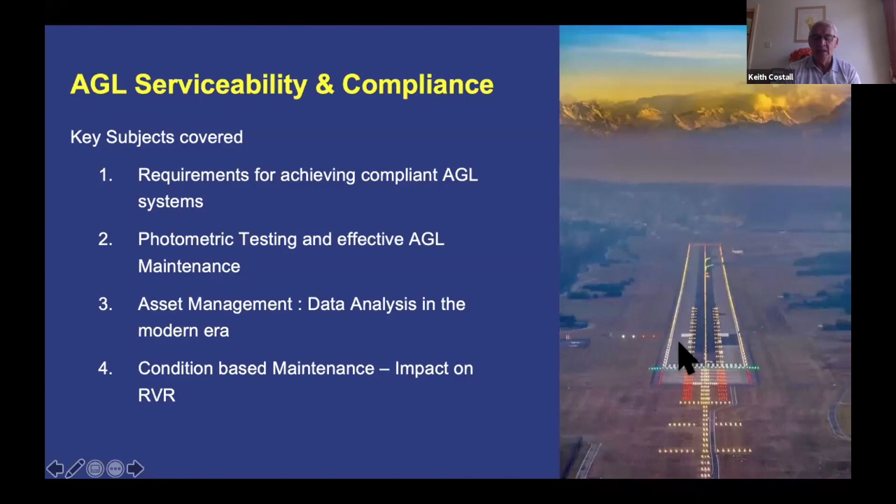So without further ado, let's move on quickly. Let's remember, every flight starts and ends at an aerodrome, hopefully. Right? That's what we want. And AGL is designed to support safe and regular aircraft operations by providing essential, clear and concise visual cues to the pilot, particularly important when visibility is reduced.

I'd just like to have a quick look at the dangers of underperforming AGL and look at the risk factor to the aviators. As the RVR, the runway visual range, comes down, the visibility comes down, the risk factor goes up, and you'll see this by this exponential curve.

But the issue is, what creates underperforming AGL? There are various factors. There's an electrical factor - why? Because it's a light unit, and a light unit needs electrical power. If we do not get the correct electrical power to the light unit, we've got a problem.

There's an optical issue, the photometric side, the output. For example, you'll look today at rubber being burnt off aircraft tires onto an inset light in a touchdown zone or a runway center line. It's an optical issue. There are issues like with tungsten halogen lamps and things like that.

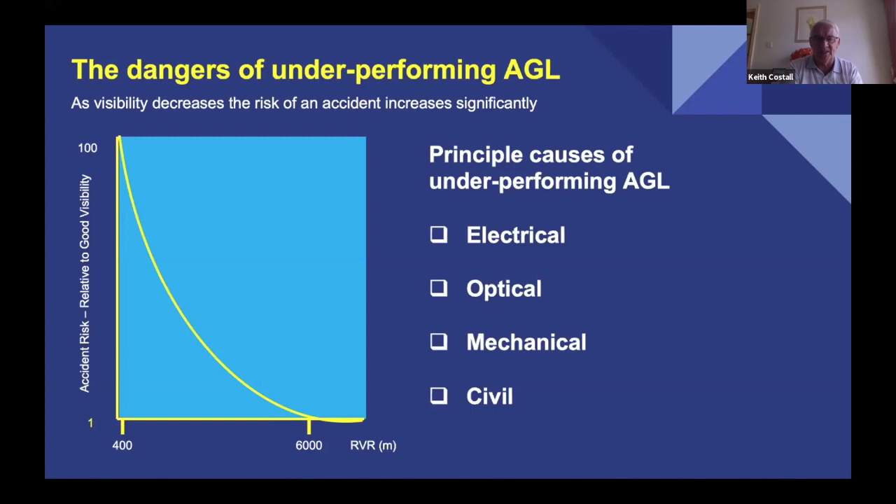So let's have a look at what happens in low visibility. I've got a few slides here. When you're coming into land in lower visibility, you're approaching, and eventually, in low visibility, you'll see the approach lights. Then progressively you'll see more lights. You'll see the lights before you see anything else as a pilot.

But as the visibility decreases, let's start with this one, around 600 meters visibility approximately. If we see a center line and some runway edge lights, that's probably what a pilot will see in lowish visibility. That is category 1, very close to moving into category 2, below 550 meters.

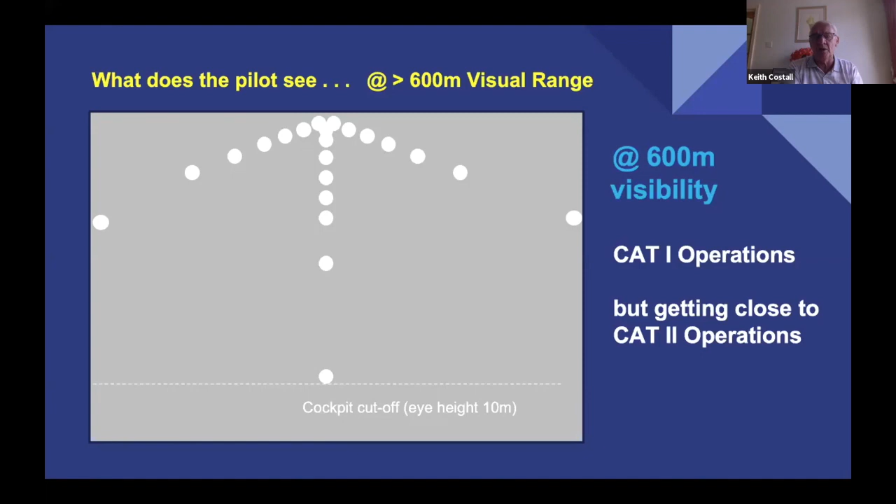As the visibility drops further, we lose the lights in the distance. So the pilot will only see something like that, around 200 meters. This is now Cat 3. If you're traveling at 200 kilometers an hour, that's around 55 meters a second, and you can only see this amount of light - it's difficult.

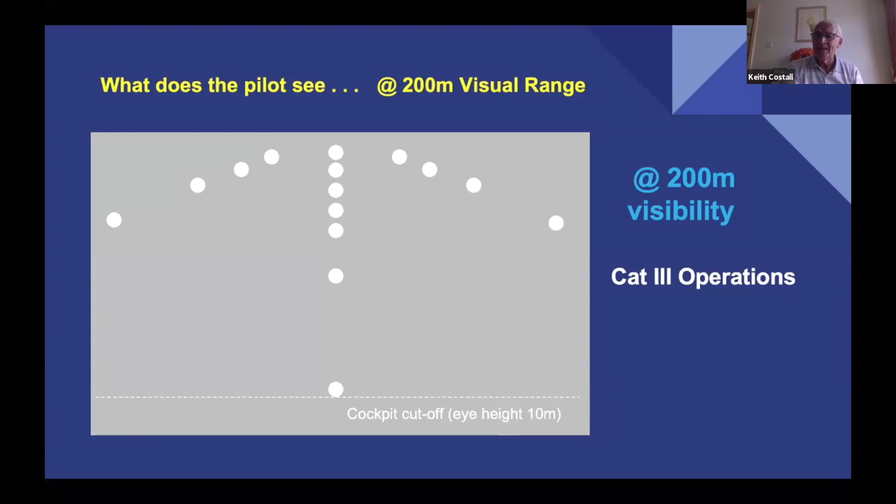Hence why category 3 approaches are principally instrument landings, getting worse as we go down to the lower end of category 3. Remember, we have category 3A, 3B, and 3C. At the lower end of visibility, about all the pilot will see at 55 meters a second, 200 kilometers an hour, is the blink of an eye.

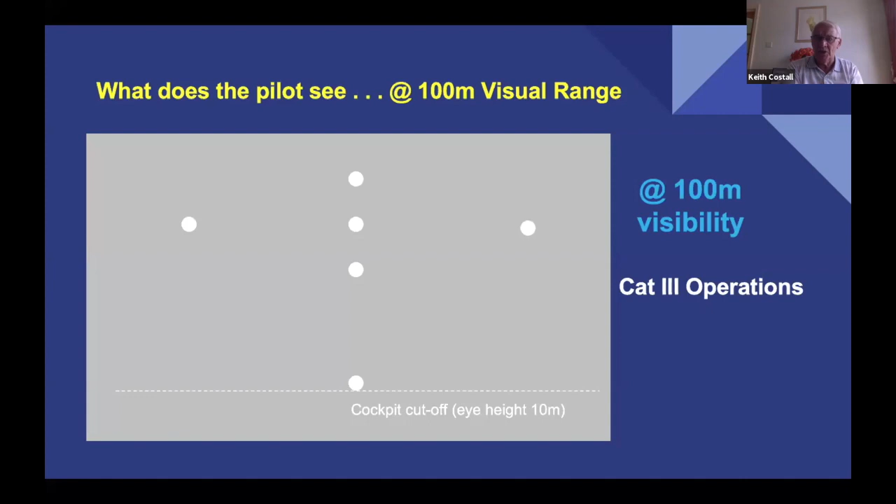And that's why it's really important that we've got visual aids to supplement the approach and landing, to supplement the electronic aids which enable a pilot to land under instrument flight rules.

So the main issues associated with light output - let's put them into 5 bullet points. The beam intensity, the average beam intensity - we look at Annex 14, Volume 1 for that, and there are Iso-candela diagrams in there which help us understand it. But also the shape and size of the beam - every single light unit in a system has its own Iso-candela diagram, and we have to point them in the correct direction. So beam alignment is very important.

We also have to have some kind of uniformity. It's no point having a hot spot down in the left-hand corner of a beam - we have to have some uniformity.

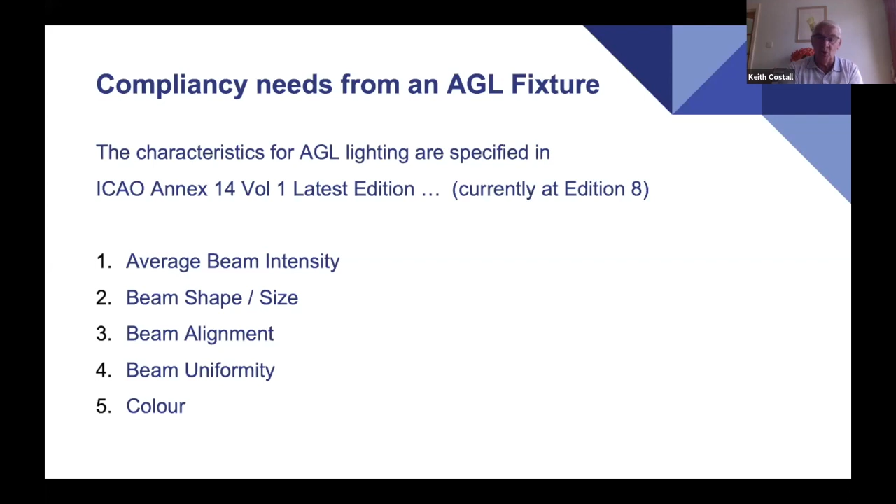And of course in AGL we use color. We need to define - the lights need to show the correct color. One of the issues in our industry over time, if there's poor maintenance or a deterioration of the optics, white starts to look yellow. So color is an important factor.

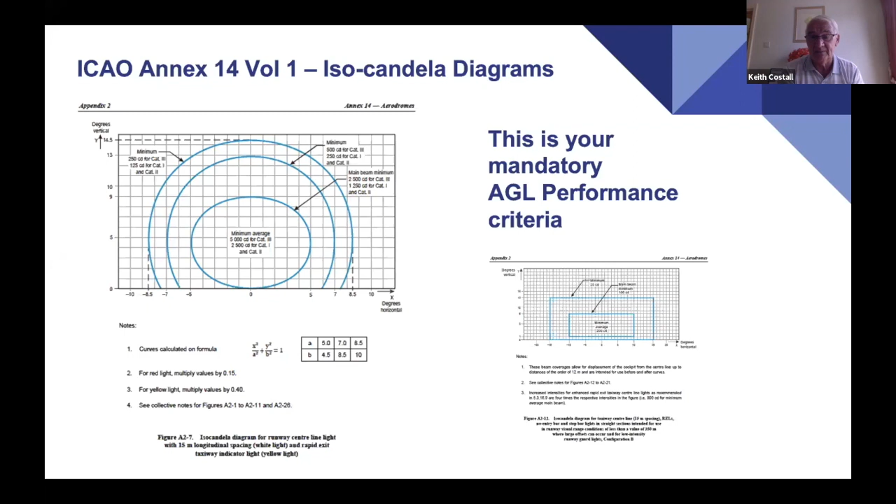Okay, so moving on, let's have a look at that inner ellipse. This is really, really important because on the inner ellipse, when we measure and want to get the average beam intensity, there is a set of grids in the Iso-candela diagram, one degree grids. The guys are going to look at this a little bit later. But when we look at this grid, and this is a runway center line, the inner ellipse of a runway center line, on this 1 degree grid there's 52 measurement positions at the crossover points, 52.

And therefore, what we do to get the average, we take the photometric calculation of every single point, add them all together and divide by the number of points. So we divide by the number 52 in this case.

Now the issue is, and what I want you to bring to your attention, if you've got rubber filled up at the bottom of the light fixture and you take away that bottom row, that is 1, 2, 3, 4, 5, 6, 7, 8 photometric points. 8 out of 52 as a percentage is around 15%.

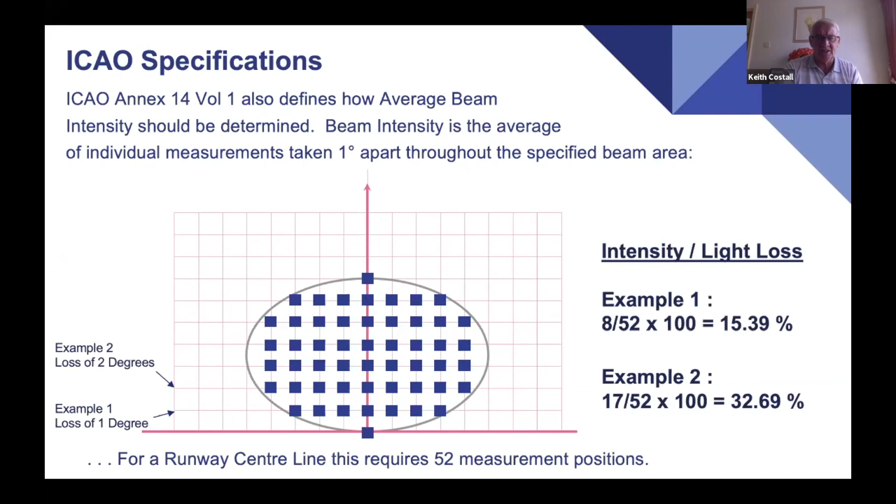And if we took out the second row, that would be 17 points, 17 out of 52ths worth. As a percentage that's nearly 33% of your light you have lost. And 33% light loss is already needing maintenance. So I just want to bring that into your thinking at this time. But the guys will look at that a little bit clearer and with more explanation a little later.

So when we're looking at light output, we're talking candela, or candela as some people call it. And the measurement of candela, we have different levels depending on the system. We have an approach system, and then we have the runway related system, and I've just shown 3 here. Generally speaking, they're all white light.

We know there are, in an edge light, they are yellow towards the end. We know that on a center line, they go red, white, and then red towards the end. But the approach lights, with the normal approach lights, with the exception of the supplementary or the side row barrettes, are all white.

So this is white light. And when we're looking at white light, an approach system is 20,000 candela. An edge system is 10,000 candela. And a center line is 5,000.

Well, that also means that as a pilot is approaching the runway, he's looking directly at those approach lights, he's got 20,000 candela. But as he approaches the threshold and gets onto the runway, then the lights are more in his peripheral vision, there's a lot of other things going on. So the ratios are important between those, and that's why we've got those different levels of light output.

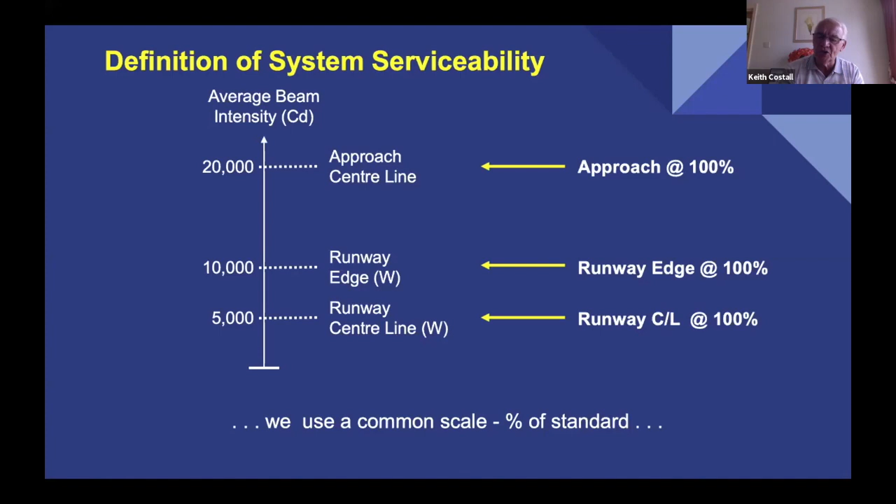But each one, if I say what light output at 6.6 amps is for an approach light, I say 20,000 candela at 6.6 amps, that's 100%. If it's a runway edge light, I say okay, at 6.6 amps that's 10,000 candela, that's 100%. And likewise for a center line, a center line at 6.6 amps, maximum candela is 5,000, 100%. So we use that percentage as a reference point.

So looking at that percentage of 100%, there's a little diagram here where I show 2 parts. There's the serviceable side, that is above 50%, because ICAO defines a light to be unserviceable when it falls to 50% or below its design. And the design we base it on 100%. So below 50% is unserviceable, above 50% is serviceable.

But we do not in maintenance wait until it becomes unserviceable before we do maintenance. So we've also brought in another percentage, which is the recommended percentage, where we start to do maintenance, servicing those lights before they become unserviceable. And that's the criteria that we adopt in photometric testing generally.

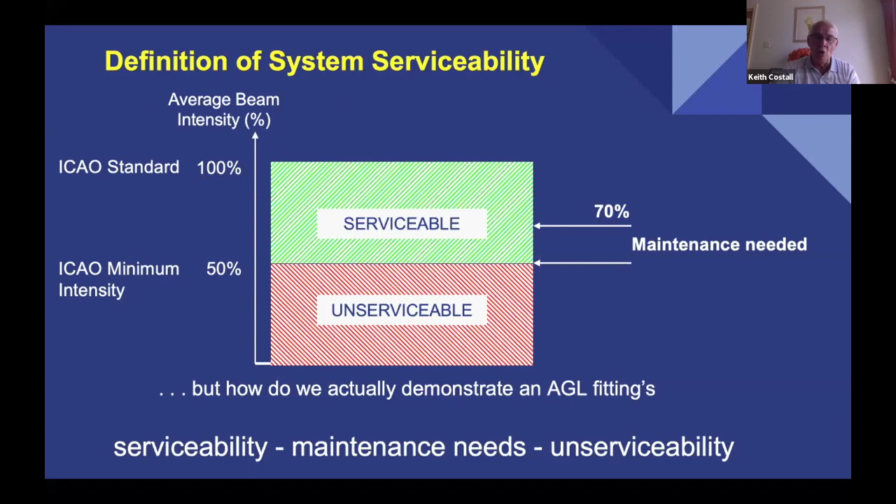And if you look at, as I said earlier, the Aerodrome Design Manual, Part 4, Chapter 17, there's a whole section on this. So how do we actually show it? Well, I've mentioned the 50%, I've mentioned the 70%, and I've mentioned the 100%. So one of the best ways and the simplest ways to show it is in a bar chart. The other guys are going to show you more in-depth ways of looking at it, but as a bar chart.

And here, look, I'm showing an absolute wonderful system really. They're all greens, so green is above 70%. But there's a couple of blues and a red. Blue is between 50 and 70% output, and red is 50% or below. So there's a pretty capture snapshot view of a typical example, and this, I'm just using the center line once again as an example.

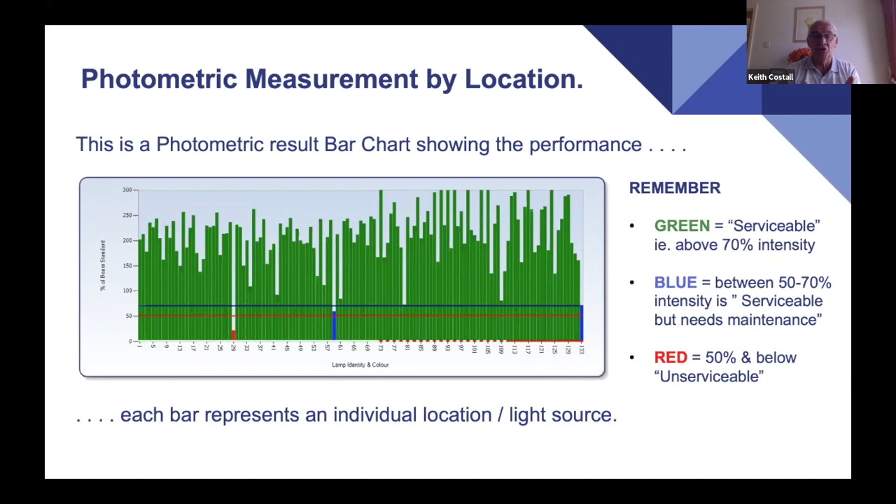Moving on, we also talk about a system. So I've spoken about an individual light up to now. An individual light at 100% is 6.6 amps, falls to 70% needs maintenance, and at 50% is unserviceable.

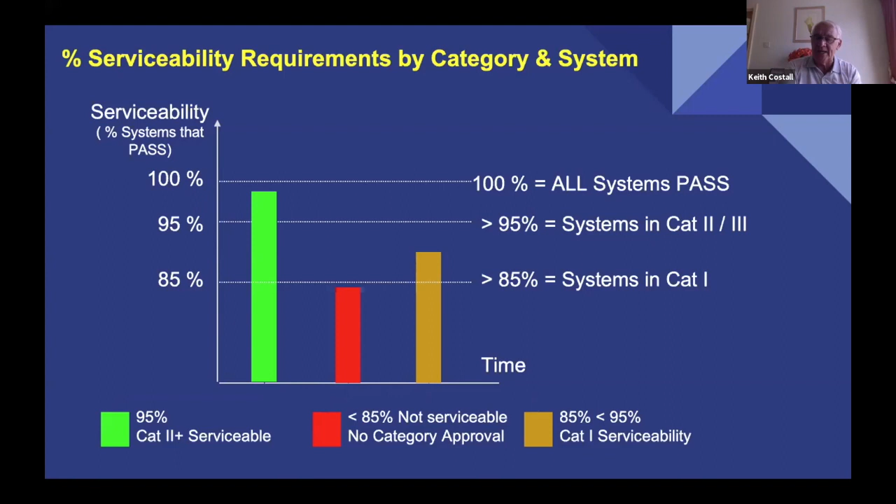But when I put those lights into a system, there's some generic ways of looking at it. If I took a runway edge lighting system in Category 1 operations, 85% of those lights need to be serviceable, with no 2 adjacent lights out. If I took that same system in a Category 2 and Category 3 operational scenario, 95% of those lights must be serviceable. So we've got a different way of looking at an individual light versus a system, and we can demonstrate that through photometric testing.

So how do we look at a light? If you're a human being, we know we've got light intensities. We normally have 5 steps of light intensity for a runway-related lighting system and 3 steps generically for a taxiway lighting system. But step 5, in the international theatre, is 100%, and step 4 is 30%. A human being can pretty much not see the difference, especially under lower visibility conditions.

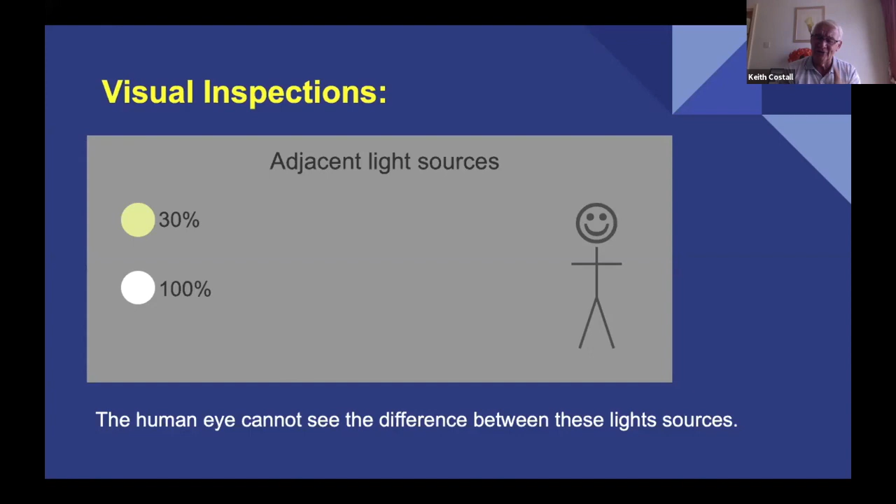This is a typical example, because the light diffracts. You know when you're driving through mist and fog and your headlights reflect back at you - same scenario, it diffracts out. So a visual inspection might be good to say, oh, that light's out, or that one looks dimmer than that one, because we're reasonably good at comparing one to another, but we can't actually measure light output as a human being. That's why we do photometric testing.

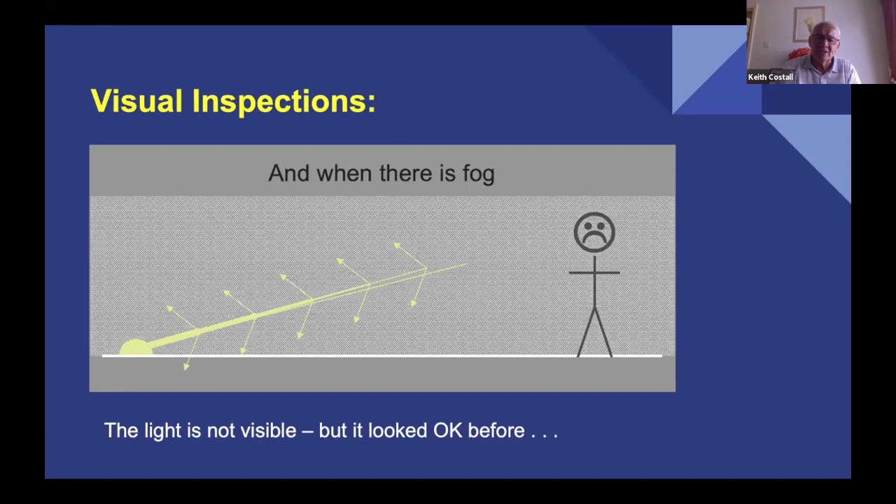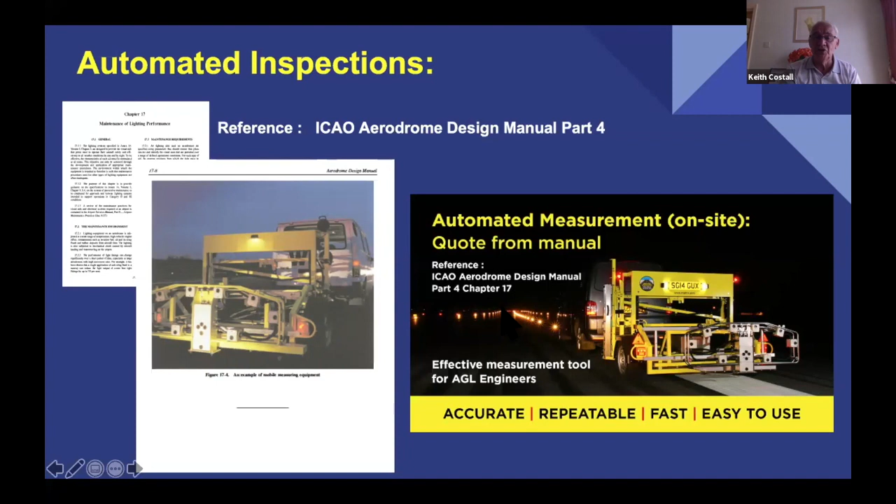Now that was taken quite a few years ago. The modern one looks very similar, but of course there's been a lot of technology advances since the early days.

So when we're looking at using photometric testing and other elements for maintenance and the effectiveness of AGL, we've got a bit of a cycle here, because the reality is you cannot manage what you do not measure. It's as simple as that. So we do have a cycle: we measure it, we maintain from the results we found, we continually monitor, which enables us to manage, and that cycle continues. And that's what we're going to look at today.

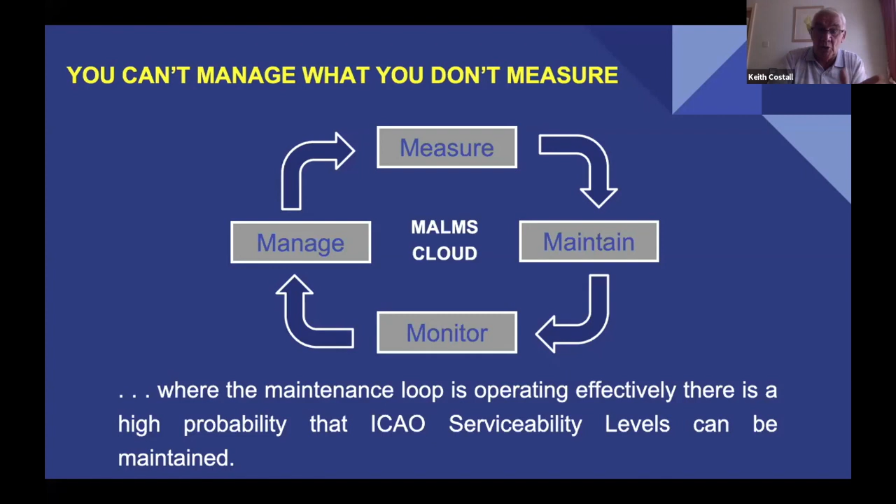So what kind of cycle of inspections and maintenance do we do? Now I'm not going to go through too much of this here, because you'll be able to get this presentation to download. But I've split it into Cat 1 and Cat 2,3, and I've just chosen 3 runway lights.

Very generically, in Cat 1 we need to achieve 85%. So if you've got, say, an edge lighting system for Category 1, you need to be doing maintenance on it probably every 3 months, 12 weeks. But if there's high traffic density, you may have to do it every 6 weeks. And if it's low traffic density, you may be able to do it every 24 weeks.

Only if you are managing - so you're measuring, monitoring - can you make this decision. So these are just an example, not fixed in stone. Don't believe, 'oh, Keith said this.' It's about measuring, monitoring, maintaining, monitoring, assessing and making these decisions.

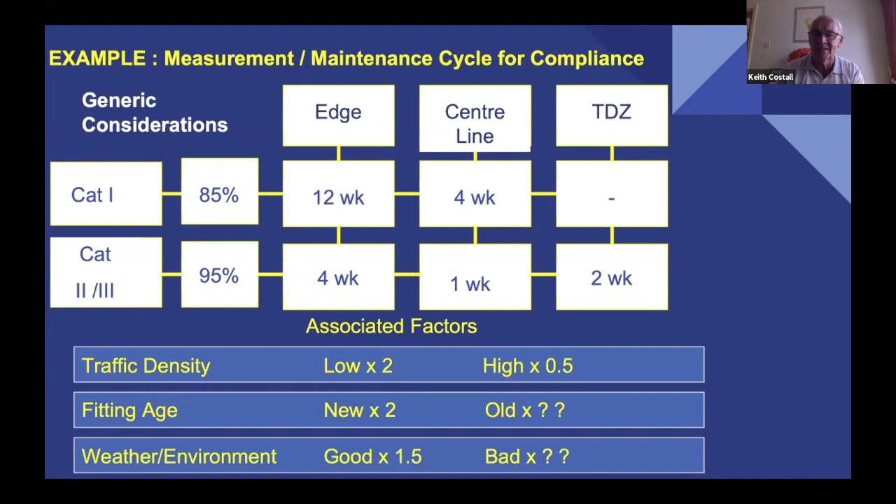So I'm moving on from there. I mentioned earlier, but I'll mention it again, some criteria associated - why do we get such a variation in performance? Electrical, optical, or civil and mechanical, and of course the light fixture. Out there, a lot of you have tungsten halogen, and a lot of you have LEDs. Different criteria is involved now between the 2 technologies, but the concept is still the same.

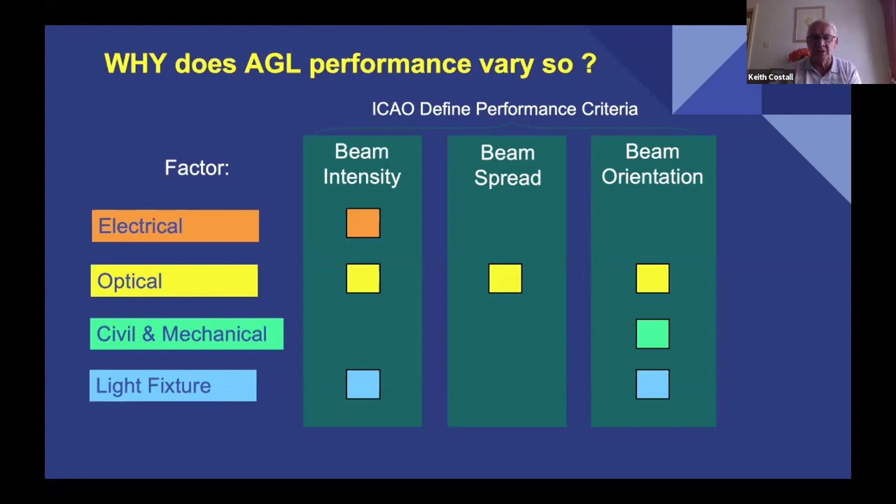So, summarizing, when I look at the life cycle of AGL - right from conceptual design, detail design, manufacture, delivery, installation, and then into commissioning - is it fit for purpose? We need to be looking at the tools to demonstrate that, and onwards through maintenance.

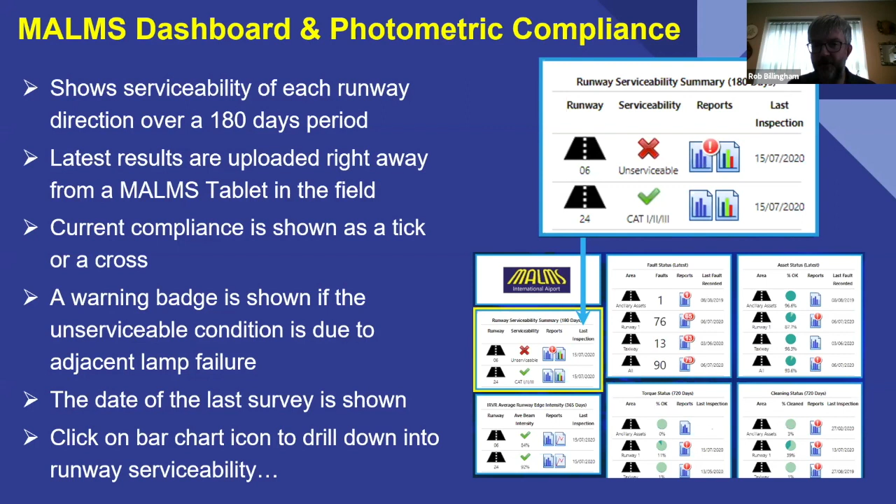We've got two icons to drill down into runway serviceability and straight into the course bar chart. Starting off, we'll click on runway serviceability, which brings up a bar chart - a single page for each runway direction in the report. Each bar represents a service: centerline, edges, TDZ, threshold, and runway end. Each service could be more than one course within the MALMS system - centerline is just one course, edges is two, TDZ is multiple courses.

The percentage shown is the percentage of lights which are above 50% of standard. To get a green bar for centerline, we need to be over 95% to be serviceable. Between 85 and 95 we'd have an olive bar, not shown here, which would leave the runway Cat 1 compliant only. Below 85% we'd have a red bar. Here on the edge we can see we're at 86%, so by rights this should be olive, but we can see adjacent lamp failure - somewhere on this edge there are two lights out together, which gives us a failure condition.

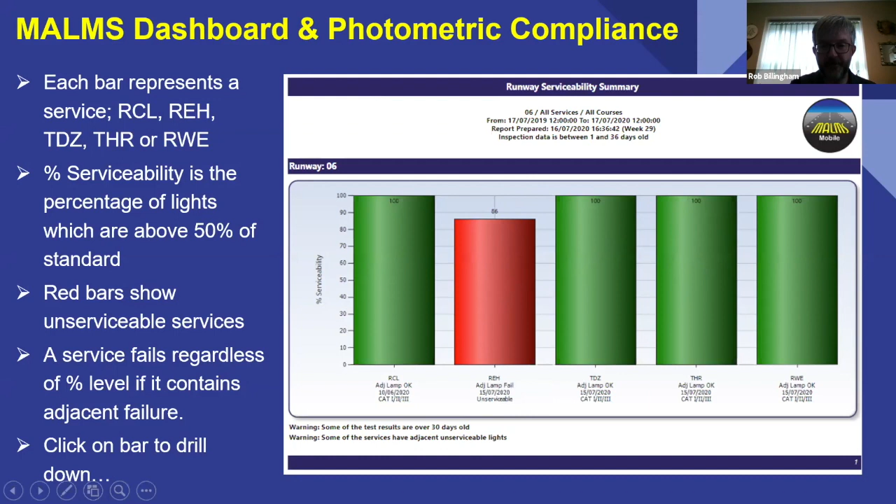So we'd need to investigate that - we'd click on this red bar and drill down now into course bar charts. This is a staple report used by moderators and engineers alike. Each bar represents a single lamp within the course on the runway - here we're looking at the edge port course.

A green bar represents a lamp over 70%. Between 50 and 70 we have a blue bar, meaning the lamp may need some maintenance. Below 50%, red bars mean lamps definitely need maintenance. We can see here our adjacent failure condition - two lamps out together, and a bit further down the runway, the pass-fail levels of 50 and 70% are shown.

We'll discuss this a bit more later. The 50% is defined by ICAO. The 70% is user configurable, and you could even raise the bar - lots of airports do, we might up this to 80%. You'd have more blue bars, but that would help you achieve even better compliance. Along the bottom you can see the lamp colours shown along the x-axis - we've got reds, whites, and yellows.

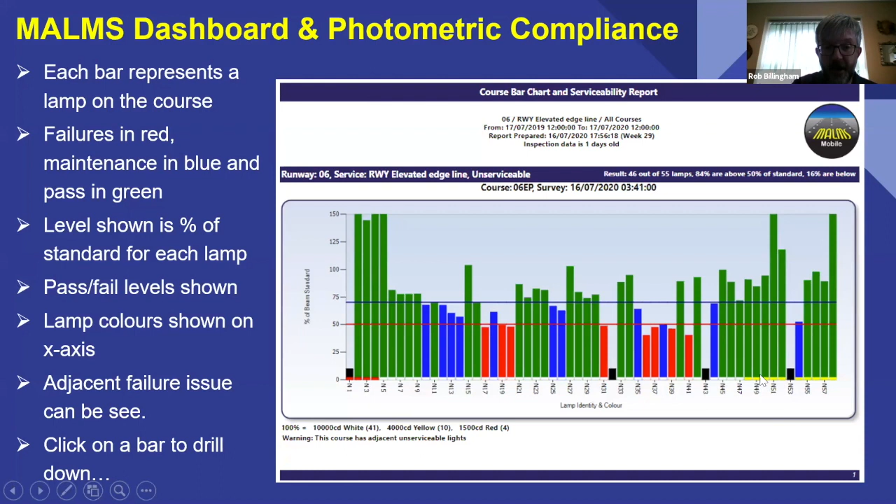So now, if we wanted to look at this adjacent failure area here, we click again and drill down into Iso-candela diagrams.

So I'm going to hand over to Paul shortly, and he's going to talk some more about iso-candelas and what they mean.

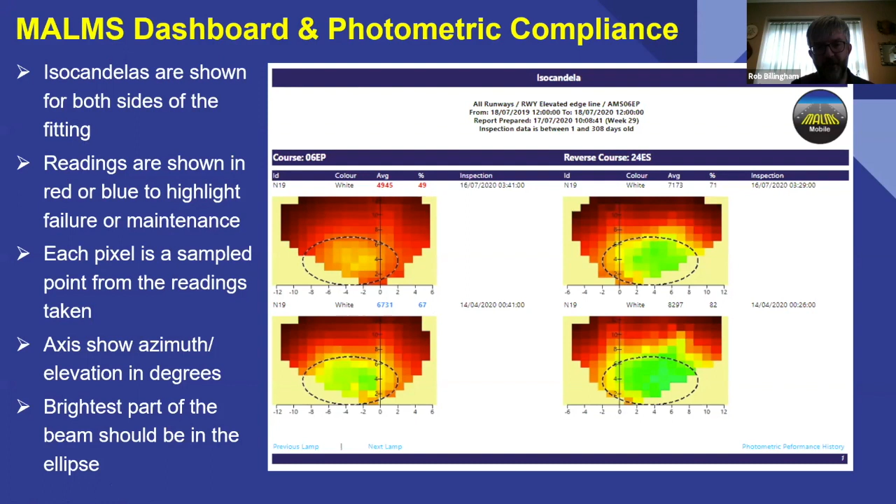Hey, thank you, Rob. Thank you, Keith, for the excellent introduction as well. So I think what we'll do now is talk about our version of an Iso-candela picture and how that is interpreted so that you can see what's going on.

The elliptical regions that you see here are the inner ellipse, as Keith explained from the ICAO Annex 14 manual. We just draw those on the screen for reference. That's where ideally we want our main part of the beam to be pointing. Our Iso-candela pictures also have square blocks. Each one of these square blocks happens to be on the 1 degree grid point that Keith was talking about earlier on, so you can see where each measurement point is.

We use our standard color method, a false color scheme where we show some strange looking colors, but it helps you to distinguish the beam pattern more clearly than if we just showed it as a grayscale image. There are options on the website to change the color scheme, but this is the default color scheme that a lot of you will already be familiar with.

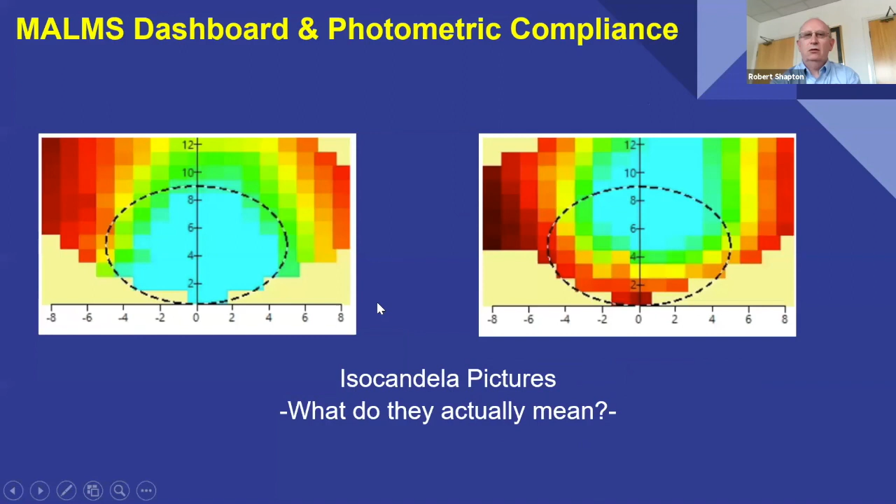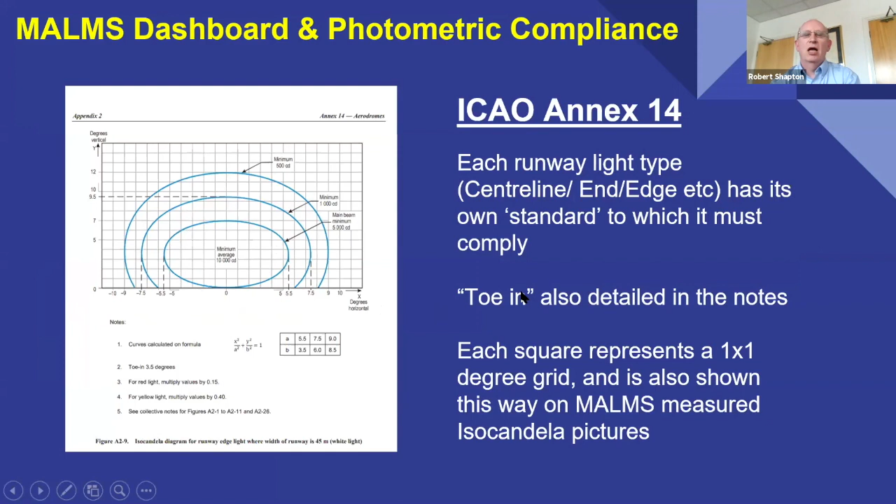So I shall move on. Here we go again - here's the inner ellipse we're talking about, and here is the 1 degree grid we're looking for. And again, as Keith was pointing out previously, there is a toe-in angle specified for some fittings like edge lights and/or touchdown zone lights.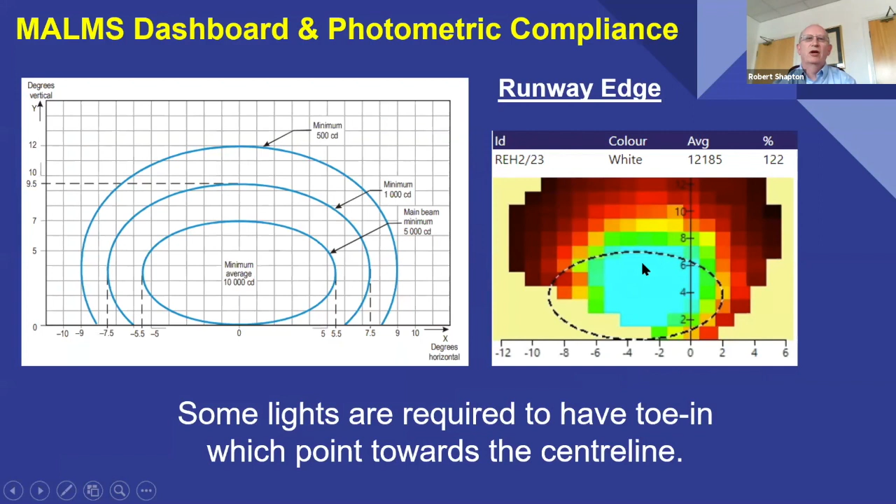So this particular example here - then we have the ellipse there, matching this ellipse here. In this particular instance, there is a toe to one side, which we've moved the ellipse across to match, the relevant toe angle being 3.5 degrees. This is where we expect the light to be pointing, and in this instance, that does appear to be quite correct.

With a lot of elevated fittings, what you will find on the top is there is an arrow or some other kind of marking which should be pointing towards the runway center line. When that is the case, your fitting has the toe left and toe right pointing so that the beams are shining inwards towards where we expect the pilot to be. If you put it the wrong way round, these light beams will be focused out into the grass, which is not where we expect the pilot to be, hopefully.

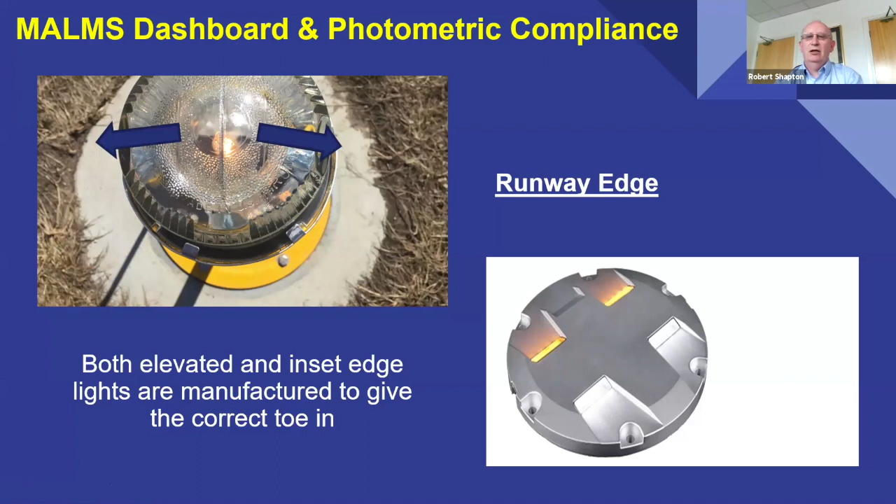Now, with the inset fittings, they still have this toe-in, but sometimes you can't see that by looking at the fitting. Specifically with the LED ones, they tend to be a little more difficult to discover which way they're actually pointing. But usually you will find a little triangular mark, an indentation, or maybe even an arrow sticker somewhere on the fitting to help you make sure you install it in the runway in the correct direction, the correct orientation.

For that elevated runway edge light, we have one side toe to the right and the other side toe to the left. As Rob has already pointed out, our reports will show you both sides of the lamp so we can look at what that light fitting as a whole is doing, or we can look individually at each side. That gives you a clue, by looking at both sides, what to expect when you actually go to physically see that fitting out on the runway.

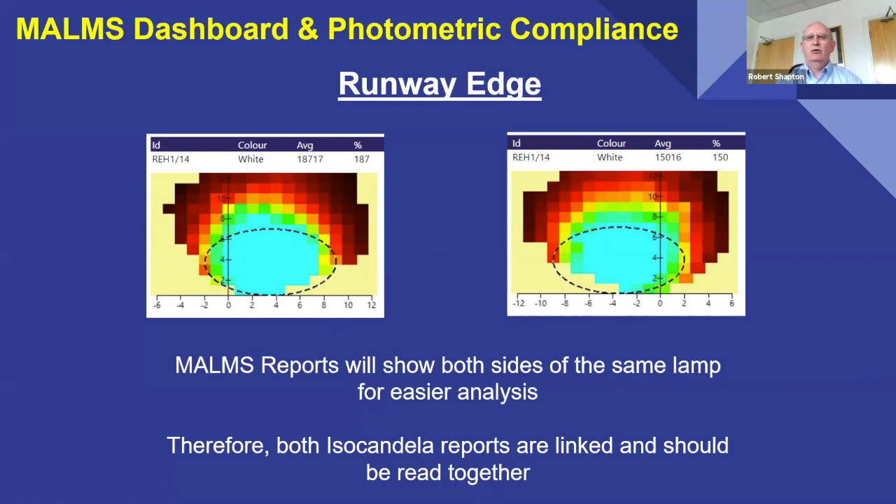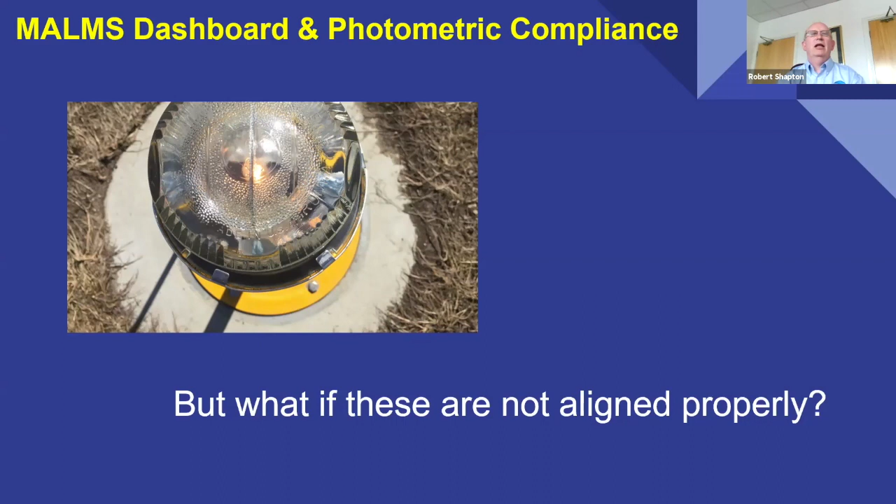For a typical elevated fitting, it's usually on some kind of frangible fitting, and people come along and cut the grass and knock these things, or jet blast comes along, or an owl decides it wants to sit on it. So they never normally stay perfectly aligned throughout their entire serviceable life. You have to keep coming along to them and adjusting their orientation and angles.

I have my glamorous assistant, Lucy, the lighting lady, who's going to help me here. She's going to do an impression of an elevated light fixture with her arms outstretched to indicate where those beams of light are pointing. She's got her arms outstretched but also pointing slightly forwards, so she's pretending to be an inset or elevated edge light, one side toe to the left and one side toe to the right. She's perfectly vertical, perfectly aligned, and the beams are pointing exactly where we would like them to be. Now there are only a few different scenarios for an elevated light fixture that can happen.

So if we push Lucy over, so she's leaning backwards, what tends to happen is that makes her arms point further up into the air. You can see here examples of what happens when you look at the two sides of the same fitting. The brighter part of that beam is now moving up out of the line of the ICAO ellipse. Just by looking at these ICAO Iso-candela pictures, before I even get to a light fitting, I can suggest to the operator, the guy who's going to go out there and do the servicing, that perhaps he needs to make sure he's got some tools on the van so he can change the alignment and make this light fixture more upright.

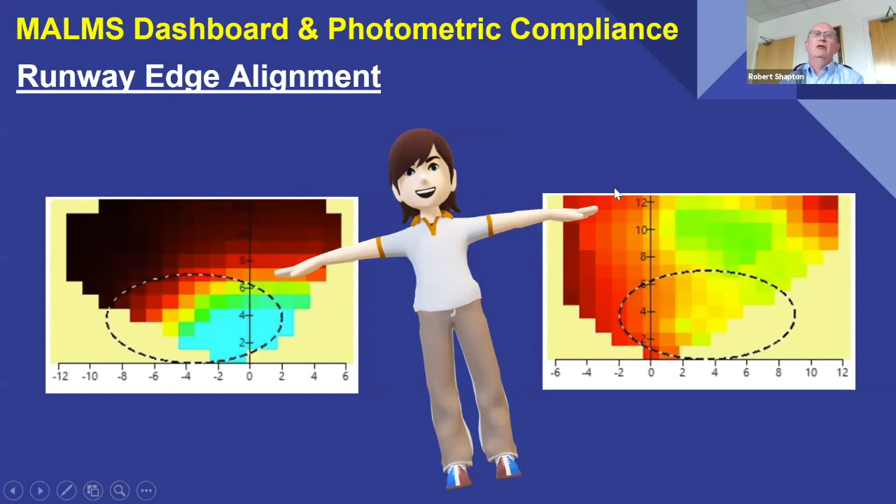The other thing that can happen to Lucy is she can be knocked over sideways. If that happens, what tends to happen is one of the light beams will begin pointing down towards the ground and the other one will be pointing up towards the sky. You can see here the brighter part of this beam is also slightly straightened, which means she's been twisted as well, but it's lower to the ground. On the other side, the brighter part of the beam is higher up. So again, by looking at these two diagrams, I can suggest that we need to align this fitting and straighten it up.

So again, if she tilts over a bit the other way, we see the difference is that this beam goes up and this beam comes down.

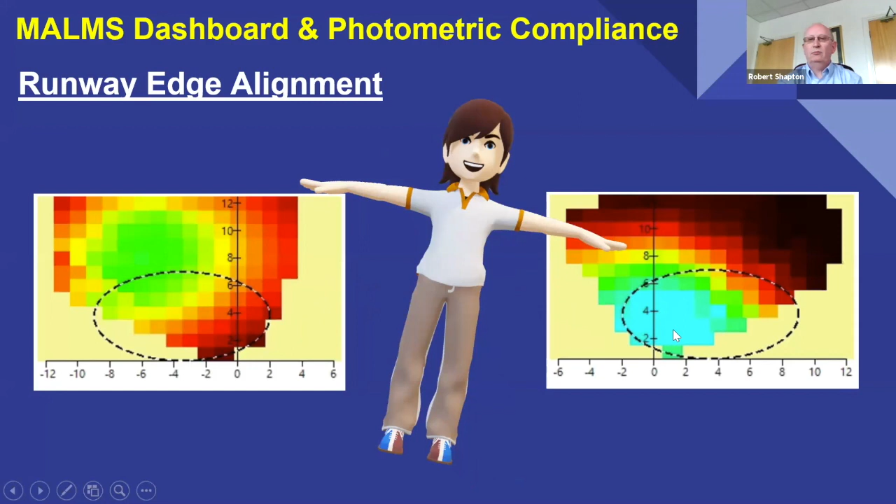Okay, for inset fittings, a lot of these alignment issues go away because it's in the ground, it's bolted in the ground. As long as the can is correctly installed and correctly aligned, then in theory, all of the light beams should point to the correct part of the sky. But what sometimes happens, more so with halogen fittings than with LED fittings, is one side of the fitting can be reasonably good and the other side can be out of alignment.

With a halogen fitting, that could just be something simple like when somebody refurbished the light and the new dichroic lamp was placed in the holder but wasn't quite square, so it's pointing in the wrong direction. I've personally seen examples where the reflector has cracked, causing something similar. Or, believe it or not, even putting the lamp in the wrong way round—they usually have an arrow that says up. If you put it in at the wrong angle, that can affect where the beam shines. The lamp is designed so the filament hangs in a certain place, so the light comes out of the fitting in the correct orientation on the sky.

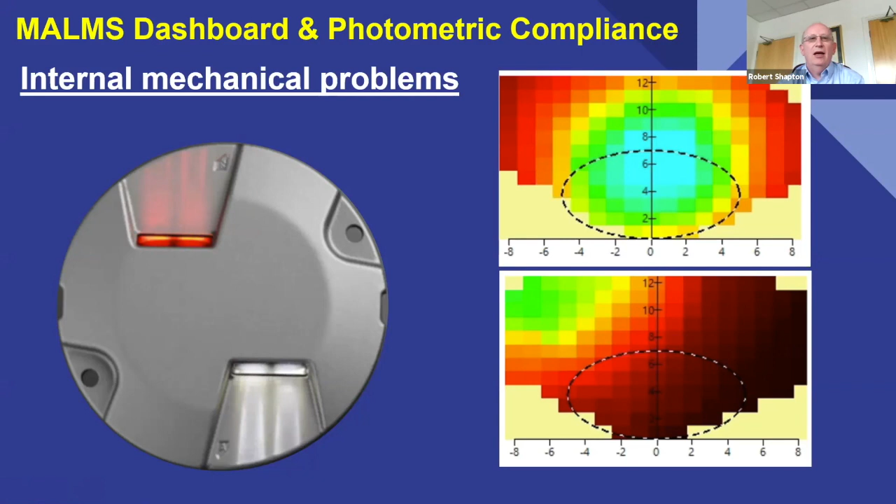So that was a very quick overview of how we look at the Iso-candela pictures. That set of slides will give you many cues on how to interpret those diagrams you get from the MALMS dashboard and these Iso-candela charts that Rob was talking about. And with that, I'll pass the presentation back to Rob.

Thank you, Paul. Earlier I spoke about the Iso-candela diagrams having a history over multiple pages. We always show, after a survey, results of both sides and the previous survey underneath, so you've got that to compare with.

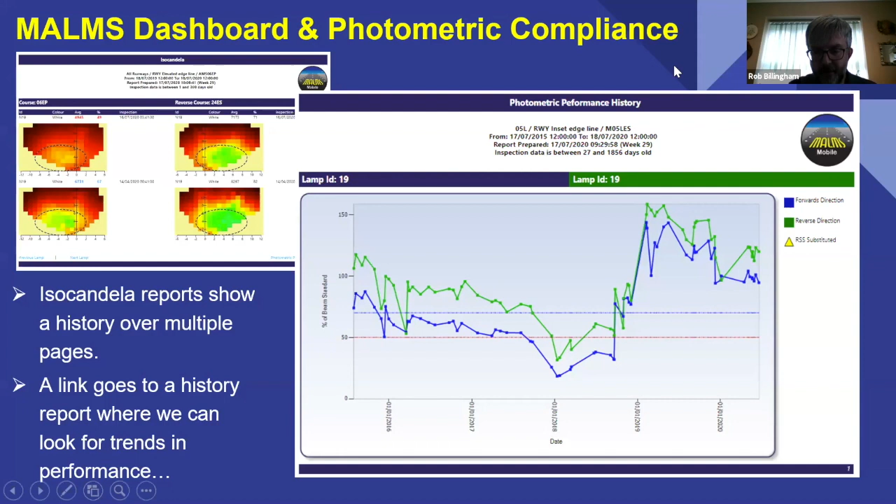So, next slide please. Okay, so another view of the photometric data is on our map. Here we're showing the course bar chart information in the familiar colours of green, blue and red, but geographically, so you can actually see where the reds and the blues are.

So I'm showing this in comparison with a course bar chart. We're looking at that edge along the top. This course bar chart is in reverse order, as the pilot would see the lamps. So we can see that third lamp along is red.

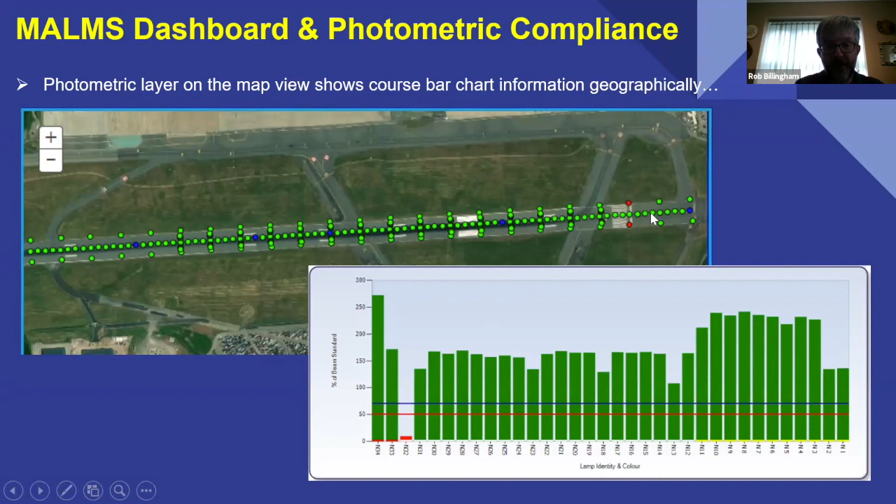Yet another tool to help you visualize where your issues are. And also here on the map, we can see the red, the lamp opposite is red as well, so that may indicate some problem on the runway there.

Now we're moving into MALMS Engineer, which is another tool we have for looking at serviceability and compliance. In MALMS Engineer, we're talking about assets now. So an AGL within the MALMS Engineer system is both sides of the lamp, not two separate courses. And now we divide the runway up into areas and zones, which is configurable, so you plan that however you want for your specific airfield.

So in terms of serviceability in MALMS Engineer, we can look at it in two ways. First of all, we can look at number of faults outstanding by area, but also we can look at the percentage of assets which are currently serviceable.

On the dashboard, we show these metrics along with warning badges. For fault status, we have a warning badge which shows the number of faults over 30 days old - these may need addressing quickly. On the asset status side, for serviceability, we have a warning badge that shows when serviceability drops below 95% for a particular area of the runway. This is one you need to really get into and investigate.

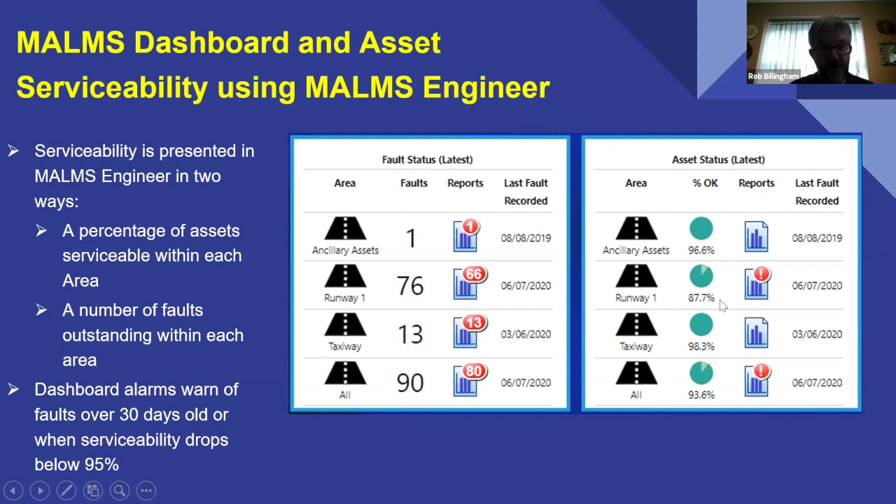If we drill down from the dashboard, we can drill into areas and then into zones, starting with bar charts. As I said, the areas which are below 95% are in a warning condition, so we show these in red.

You click and drill down again into zones, and you can see which zones are in low serviceability. If you click again, you drill down into individual assets in that zone as tabular data.

We're not just talking about photometric faults here - we also include MALMS Engineer inspections, visual inspections. There might be lights reported out, electrical faults, or physical faults with the lamp. All these things come together with the serviceability.

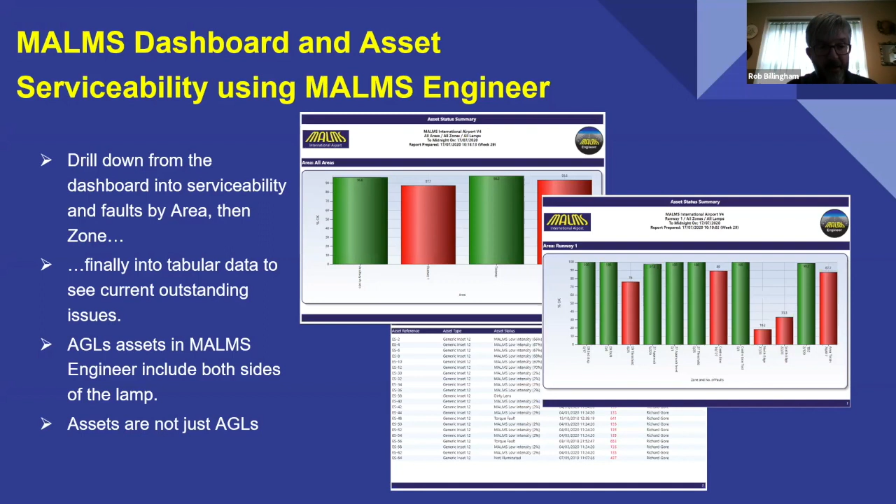If we're looking at an individual asset within MALMS Engineer, we have a report called Asset Information, which is a complete audit trail for that asset. It gives us information about the asset - where it is, what area and zone it's in, what runway it's on, that sort of thing.

Then it shows the current status of it, its current serviceability - is it serviceable, if not why. Has it been cleaned, when and by who? Has it been torqued? Has it been photometrically tested on both sides, and what results were achieved? We show the last 10 faults for that asset and some recent torque information. This is only the first page of the report.

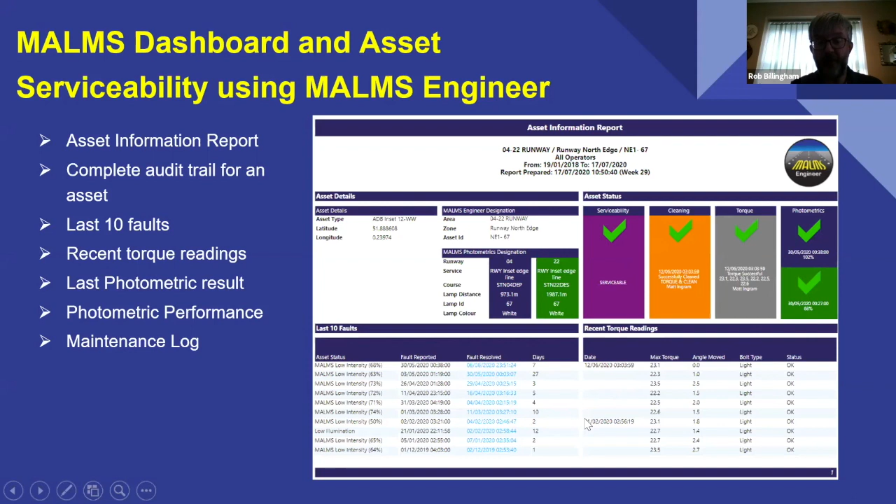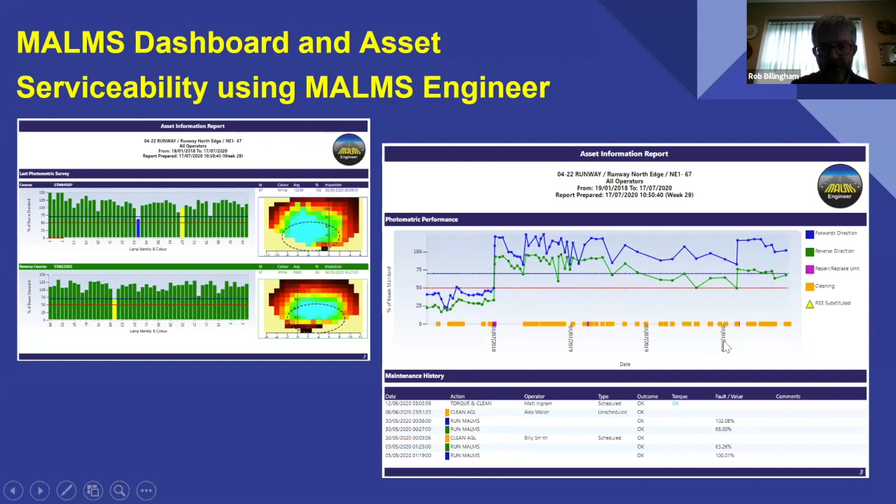On subsequent pages, we show even more information - the course bar charts from the last survey on either side, and the latest Iso-candela information. Then we show the photometric performance graph, combined with cleaning and repair/replace information shown along the x-axis as little points. If you see a purple point there, you'd expect a big improvement after your next photometric test. All this information, including the photometric results, is shown in a log which continues over subsequent pages.

Another thing we can do with the map in MALMS Engineer is pinpoint areas which have multiple failures over time using a heat map. We show the AGLs from white to yellow through oranges and red for 10 or more faults over a period, picking up on hotspots on the runway which might indicate circuit faults or lamps needing more attention over time - such as on the lead-on or in the TDZ area.

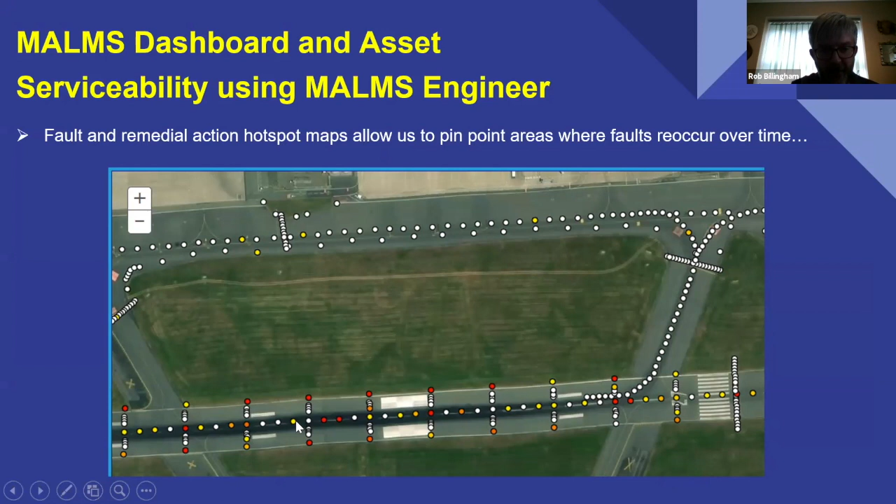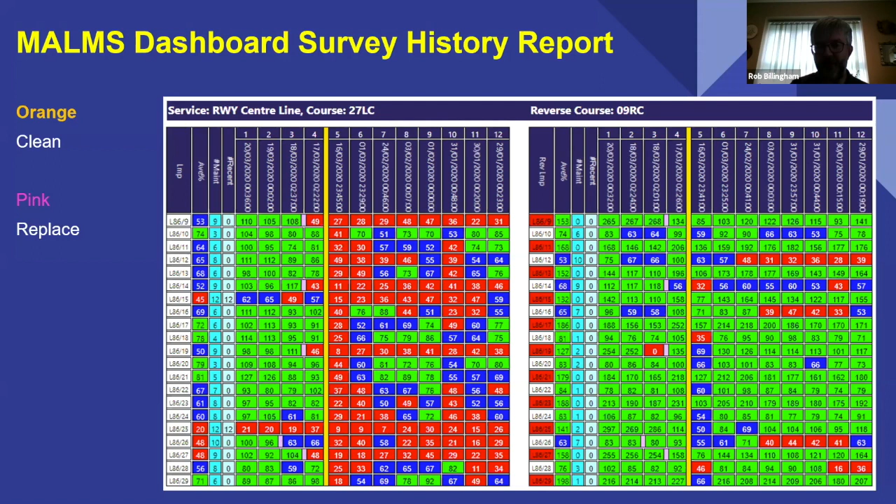Oh, hi. Hello. Thank you very much, guys. I think it's pretty clear that, if you have an asset management tool, such as the MALMS engine, and the MALMS engine is the most effective one in the marketplace, and I can safely say that.

But the real issue is that we need to be able to service our customer, and our customer is the pilot, the airport, the regulatory body, etc., and the airlines themselves, because the key issue is that the lights must work upon demand. Then it must be worked in a compliant manner. And ultimately, whilst we are servicing our customers, we're doing it to ensure that there's safety and there is compliance.

So for pilots, they get the best visual cues when they need them, upon demand in low visibility conditions. The airport operator themselves, they're the owners, they're maximising their facility, because the airfield is an asset to them.

And the airlines, well, if you're coming and flying from Istanbul, and you're flying into where I come from, say London Heathrow, then the last thing you want is to arrive at London Heathrow and say, 'Oh no, can't take you at the moment. Would you go in the stack?' Or even divert. And once you start to divert, then you put aircraft in the wrong location. We've got air crew in the wrong location. They run out of hours and all things like that.